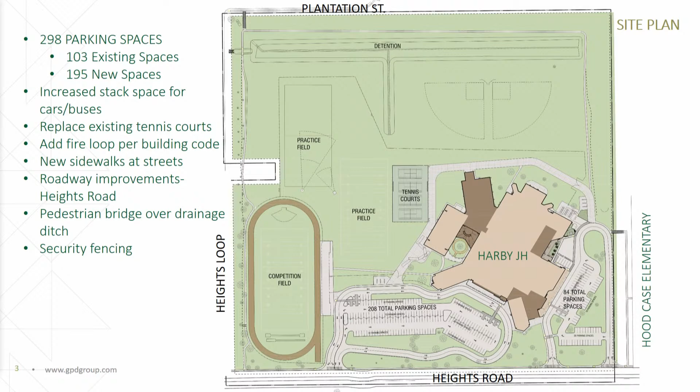And then going inside the building, overall this building's going to get completely touched all over the place. We're going to get new mechanical, new electrical, new plumbing, ADA upgrades, security upgrades, all new technology. So what I'm going to do is go into quadrants in this building to zoom in closer so you can see a little better what's going on here.

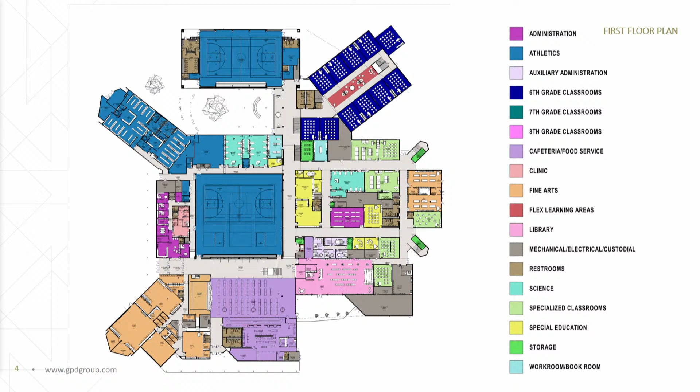If you look at that orange area, that's the Fine Arts Addition. There's an existing band hall and an existing choir room there. We're going to transform that into two individual band halls. We're going to add an additional room for choir and an additional room for drama, and we're also going to add a stage that wasn't in the building before.

The administration area is in the maroon or purple color up there. You can see there's a secure vestibule with two sets of double doors. That'll be bullet-resistant glazing, with a talk-through window, then they can get buzzed into the administration area. The police department and security is right there, and the clinic is right there with easy access, so parents can pick up their kids without having to leave the secure vestibule area.

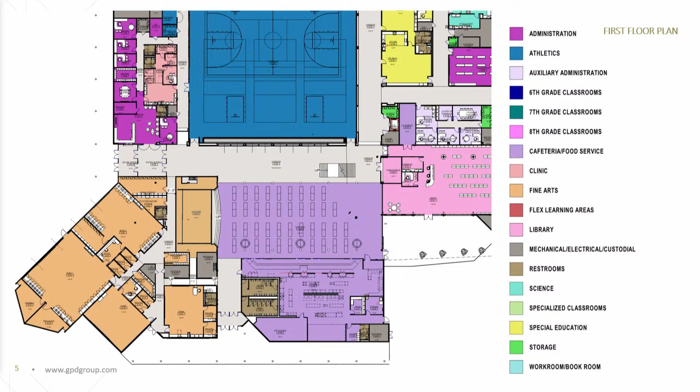And then the kitchen will be updated, and we're keeping some of the equipment that was renovated in 2014. It's still in good condition, like the freezer cooler and the serving line. And then the cafeteria, we're going to give that a makeover as well.

This will lead back into the library, which you'll see in a moment. Outside behind that glass is a dining patio that fronts the library and the cafeteria to create a nice space there as well.

This is the first floor of the main building. The yellow is the special ed wing, which is relocated from where the orange space was, where the art classrooms are now. There'll be all new STEM classrooms in this area, a multi-purpose room, and you can see that office suite in the light purple color—that's the counselor suite. It's integrated into the space, so kids can go in there quietly without being called out for going to the counselor's office.

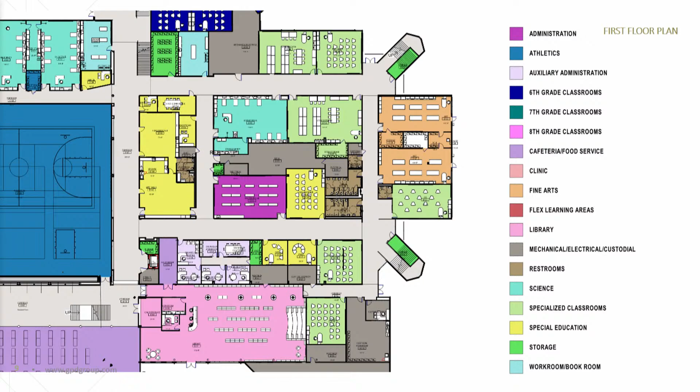The library is currently in the center, where you see the purple multi-purpose space and the lighter blue science lab. We're moving the library down to the lower part of the building, which will give us a chance to put some more natural light in there. We're adding a learning stair, offices, stack space, and all that. You can see that here.

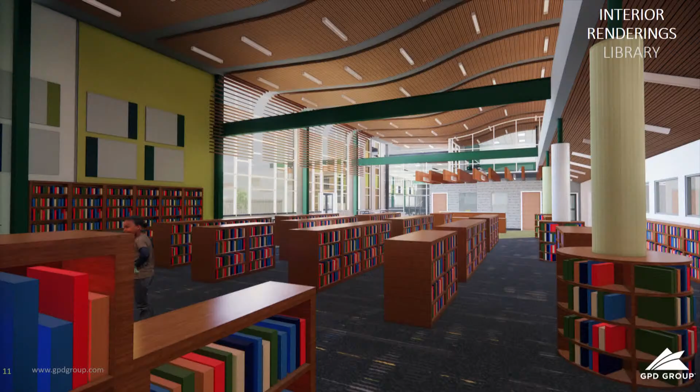Again, lots of natural light. We're updating the colors a little bit, and we're getting rid of the old yellow.

You can see the lower office space nested in there, and above those beams that are going across are existing, so we're going to expose that existing structure just to acknowledge what was there before. And then this is the view from the other side.

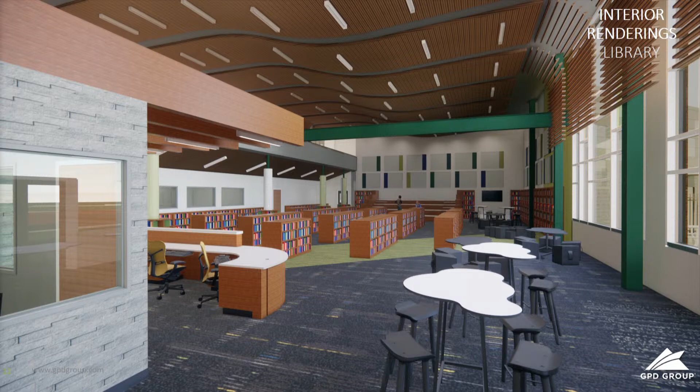You can see the learning stair in the back there, and again you can see the nice natural light in here. Those windows are from the counselor suites out there, so they can look out into the library as well.

This is the athletic areas. You've got the existing gym, and we're more doing a fix up there. We're going to put new goals in - the old goals are manual, so we're going to put automated goals with key switches.

Again, we're going to put Solatubes in there to get some more natural light in the gym, and we're going to get rid of the old skylights that are leaking.

The pool is going away, and what was nice about that is that really freed up a lot of space in the existing building. That allowed us to put the administration wing on the front of the building.

The light blue area is science classrooms, and where the pool is, the new locker rooms will be. What's nice there too is that gives us enough space.

We had our structural engineer examine the structure, and it was in really good shape. We were able to consolidate all the locker rooms into one place, as opposed to right now they're kind of split up into different areas.

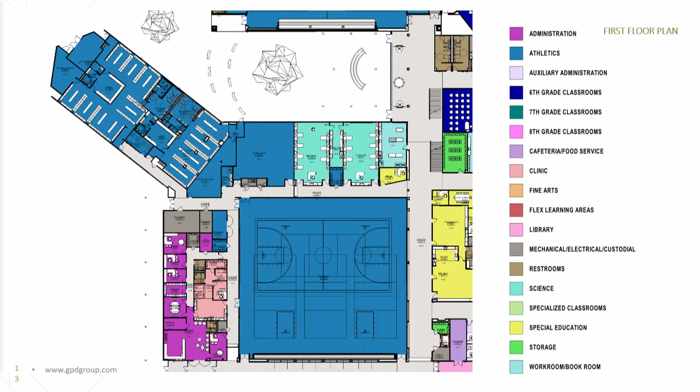You can see there's a courtyard in between the new gym just above there. The gym that was added in 2002 is above there, and we're going to make a courtyard. You can see where that little curved bench is - that's a covered patio, and you'll see that later in our presentation.

This area here, in the dark blue, is the new academic wing, and that'll be for sixth grade on the first floor. There's 11 classrooms in there, again lots of natural light, and the flex space is in the middle.

You can see the auxiliary gym just to the left there, and you can see that's connected - now it's inside the building. You're not having to go outside to get to the gym now.

And we're going to renovate the auxiliary gym. The floor is in good shape - we're gonna protect that during construction, but we're also gonna add Solatubes in there.

Also, if you look to the left of the gym, you see that very large restroom space - that's for the bleachers and the grandstands out by the track. That way, we didn't have to build another field house back there for restrooms for when there's events going on.

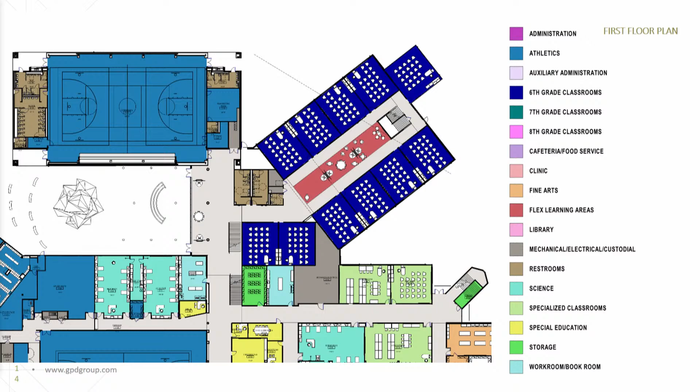And then this is an image of the new academic wing, and you can see the flex space there. One of the things to note here is the tile pattern - we used the design to promote social distancing.

But it doesn't look like we used the design to promote social distancing - we didn't just put circles on the ground.

And again, design-wise, this is very in line with the schools that y'all have been doing in other parts of the district.

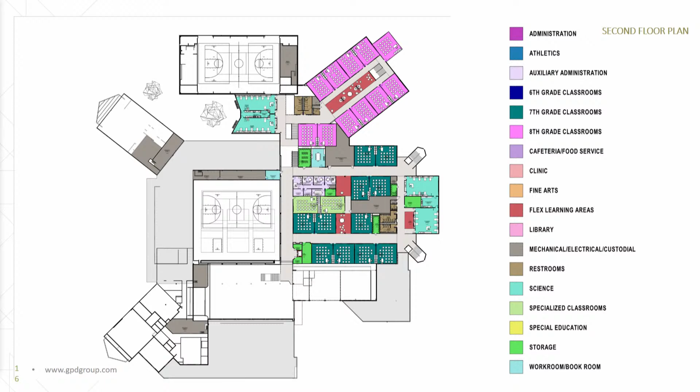The second floor overall plan, again more classrooms - this will be 7th and 8th grade, and we'll zoom up on these.

This is the 7th grade wing. You can see the science classrooms are on the right. The red spaces are flexible learning areas, and you've got another 11 classrooms plus 2 social studies classrooms, and then the assistant principal suite in the light purple color.

All of these classrooms that are on the interior will have Solatubes to bring natural light into those spaces. The other thing is that all of these classrooms will be 150 square feet bigger than what they have now, to meet the current standards that Alvin ISD has.

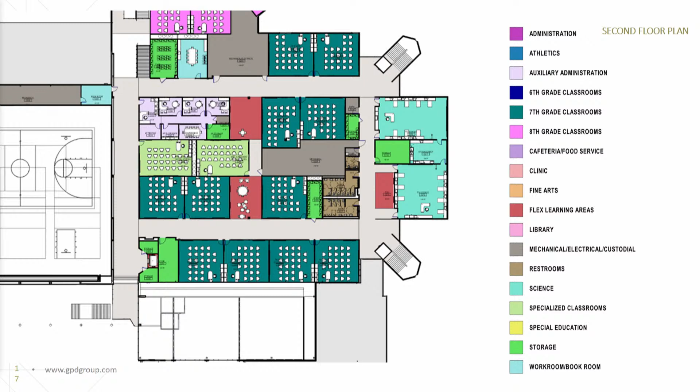And then going up to this is again the new academic wing on the second floor, and this is 11 classrooms for 8th grade and the flexible learning space.

They have the 2 science classrooms on the left there, with the covered patio underneath. And again, there's some windows that'll frame out that nice tree that's there that we're gonna preserve.

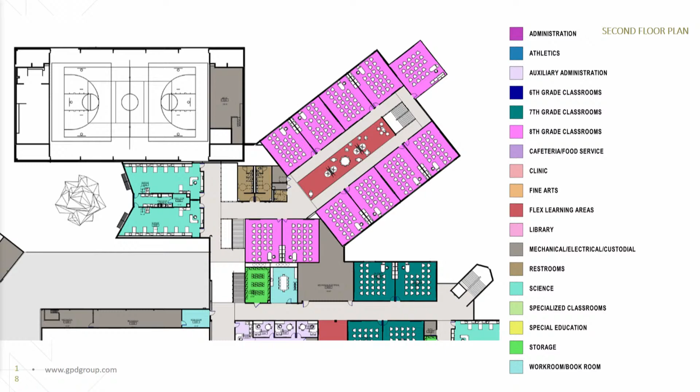One of the things is that this building currently is taking on a lot of moisture from the tilt wall panels. So we're going to create a rain screen system for the building to protect it, to keep the moisture out, and it'll also help with the energy efficiency of the facility.

The building's also getting a whole new roof system. They're going to tear it down to the deck and put a whole new roof on it.

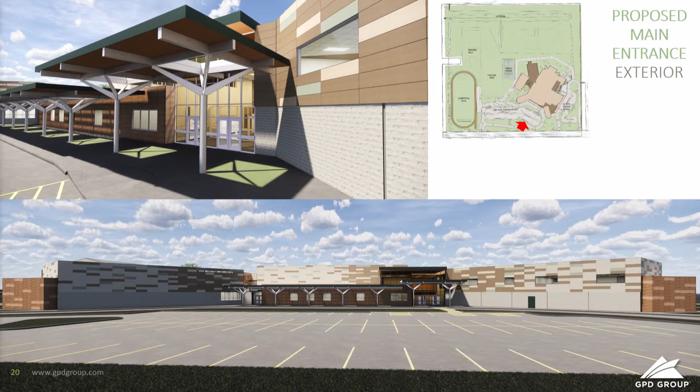So this is the new front. These panels are, and you can see by the floor plan, the red arrow shows where the view is coming from. This will be the view from Heights Boulevard, or Heights Road, I'm sorry. We're doing an aluminum canopy that has a kind of tree look to it.

The bottom is a thin stone material, and the upper panels are a concrete panel system called Nichiha. It's a modular system we've used on several projects before, and it works really well. It comes in different colors and patterns. You can see there's a wood pattern on the ends on either side, and then there's different colored panels—it's kind of a modular system.

The other thing we're doing here is we're actually raising the roof height, putting a parapet on the roof, which will hide a lot of that kitchen equipment that's there. Also, when your district maintenance people are up on the roof, if they slip or something, they won't fall off.

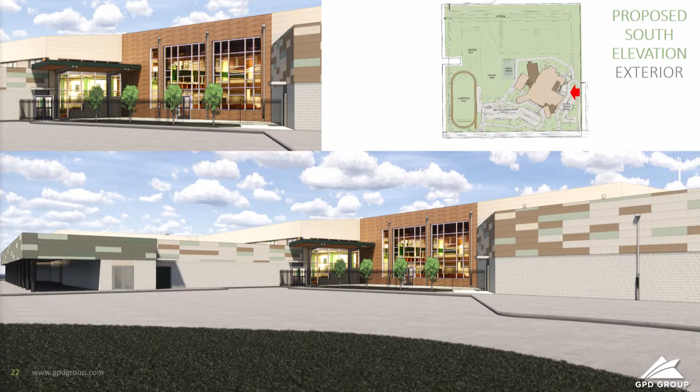And then this is the south side of the building, and that's the new gym that was added in 2002—you can see that's just kind of a typical tilt wall panel.

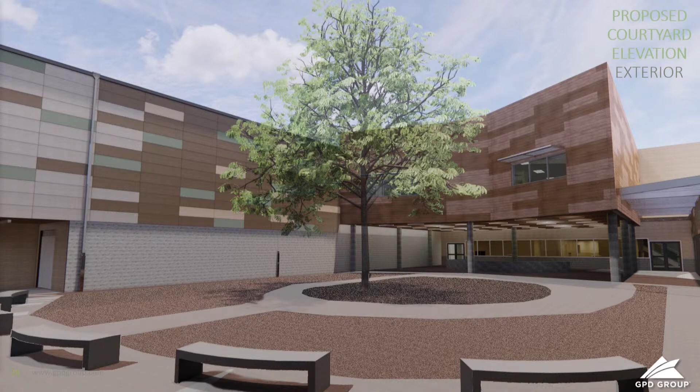And then this is the proposed courtyard, and from here, again, we're going to preserve this tree. You can see the inside there—there's the covered area for the students, and then there'll be spaces outside for kids to sit. I think it'll be a really nice space when it's done.

And I'm going to turn it over back to Pat to talk about the schedule.

So Board, if you remember before Mr. Miller comes up, Harvey Junior High was the only school that didn't have a stage once Alvin Junior High was renovated. And so when we talk about equity within our facilities, that was something the junior high was missing, along with a lot of upgrades that needed to be done there.

Yeah, absolutely. To piggyback on that, the number of science labs, large group instruction areas, flexible learning spaces, black box, stage—all those will be amenities built into this.

We recently did this—well, it wasn't recently, it's been about 5 years ago—with Alvin Junior High School, and with great success.